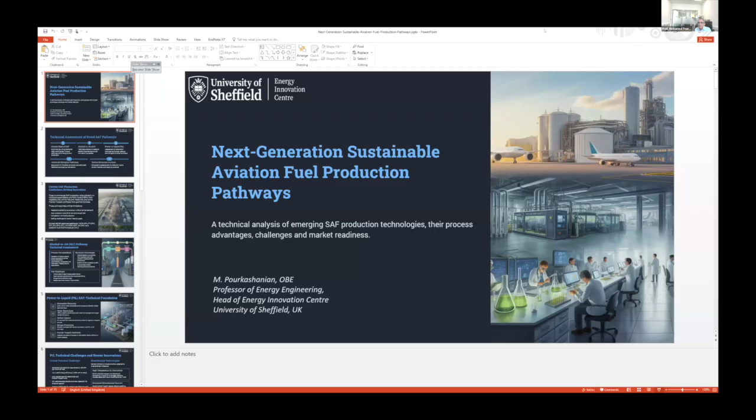Professor Pourkashanian, would you be able to switch on your video? Can you see me or can you hear me? Yes, I can see you and hear you. Okay. Would you like me to upload it or you are doing it? I would prefer if you could upload it. It would be easier to navigate. In case you prefer that I upload. No, sure. I will do that, no problem. Can you see my presentation? Yes, it's just come up. I can see it in normal mode. Okay, it's on the second screen. Sorry, let me just. Sure. Should I present it? Happy to do that. Sorry? Should I present it? There is a two screen here, so it goes onto the second screen. Let me just. Sure. Yes, please take your time. Okay. Let's see whether I can do it now. Okay, can you see now full screen? Yes, we can. Thank you. Okay, thank you very much.

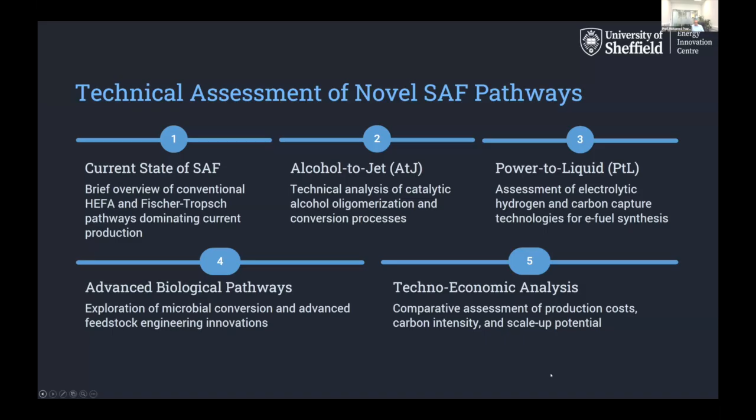But as the previous speaker mentioned, there are other options available: alcohol to jet. There are certain technical issues that have to be resolved and optimized, but it is available. You can actually make SAF from alcohol to jet, whether it is methanol or ethanol depending on the route that you produce, but also power to liquid. Power to liquid is a very interesting route, because your feedstock is more or less unlimited. And when I say unlimited, providing you have green hydrogen and you are capturing CO2, whether from a combustion process or from direct air, you can produce SAF using power to liquid. And there are some other technologies coming in, and these are more advanced biological pathways. We will look at these very briefly in the next 15 minutes.

So why do we say HEFA, which is the existing technology, why do we say that we still need some other technologies? One of the reasons is definitely feedstock, availability of feedstock, cost, and more importantly, the carbon footprint. In other words, if you're using HEFA, at best you will be replacing fossil fuel in terms of CO2 emission by around maximum 75%, depending on the way that you produce it. And therefore, in replacing jet fuel in terms of CO2 emission, HEFA only covers part of that.

But more importantly, from a commercialization point of view, there are certain critical limitations. These are feedstock availability. If you consider all the feedstock available through the route that has been used at this moment, you're talking about 2.5% of the international jet fuel demand. Look at the cost: one of the major issues for SAF is the cost, and therefore high production cost at this moment. The best you get HEFA at the market is around $2.2 per liter, and therefore it is pretty high in comparison to jet fuel.

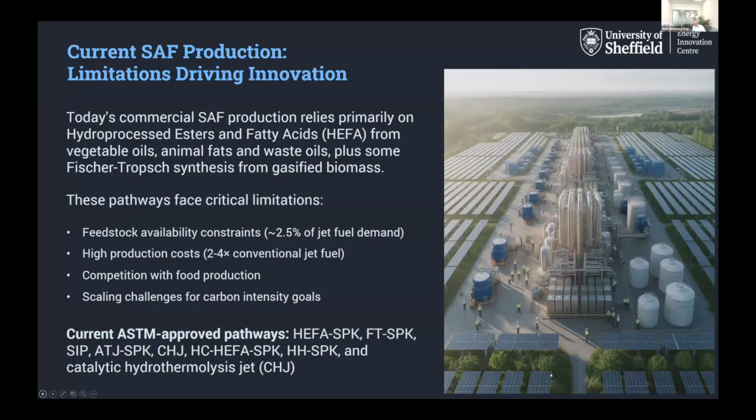And more importantly, there is a competition between using feedstock through the HEFA route to produce fuel and food production. So there's another challenge, and a scaling challenge for the carbon intensity goal that I mentioned before, that it doesn't replace jet fuel at 100%.

So what are the technologies available? Alcohol to jet, and these are the alcohol to jet pathways, methanol and ethanol. Ethanol is possibly the best route because it also has an infrastructure already set up, so you don't have to restart from the point of view of building the plant for ethanol production. And the process fundamentals, I will not mention too much because previous speakers already talked about this.

But in terms of technical advantages over HEFA or over the existing technology, you have variation in the feedstock. You can go all the way from sugarcane, corn, and all other types of biomass into ethanol. And more important, as I mentioned, utilization of the existing ethanol infrastructure and superior cold flow properties in comparison to HEFA, and more importantly, lower aromatic content.

And I will come back to this later on, showing one example from Flight 100, why reducing aromatics in the fuel has a major impact on the contrail, on the energy density of the fuel, and therefore is considered a benefit, providing we stay within the 8% rule of the ASTM.

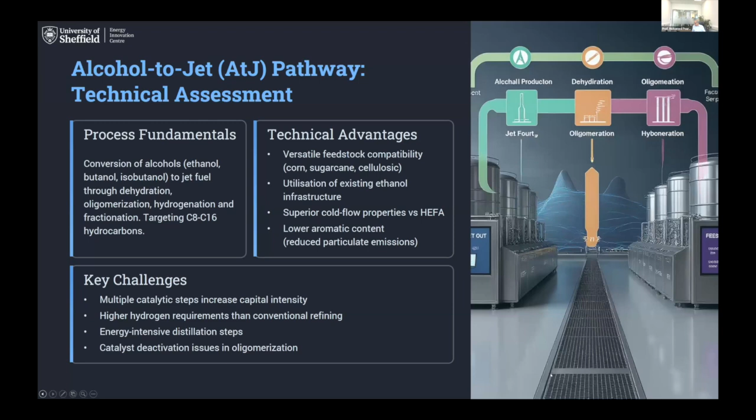Power to liquid: what are the technical foundations for power to liquid, and why is there really a push, especially in the European market, towards power to liquid? If we look at the regulation mandate of the European Union, by 2050, according to that mandate, 70% of all the fuels to be used in the EU should be SAF, or non-fossil fuel. And out of that 70, 50%, or in other words, 35% of the total jet fuel used in Europe by 2050 should be power to liquid.

Power to liquid has many advantages, especially in terms of carbon footprint. It is produced providing you use renewable electricity, and this can be excess energy that is available, solar, wind, or any other sort of renewable power, biomass, BECCS. Water electrolyzer, whether it is PEM-based or alkaline-based. Carbon capture, whether you capture the CO2 from industrial or power generation, or whether it's direct air capture or a biogenic source. Carbon capture has to come from there. And then, having all those three feedstocks, you go through syngas production, and once syngas is produced, you go through a typical Fischer-Tropsch process.

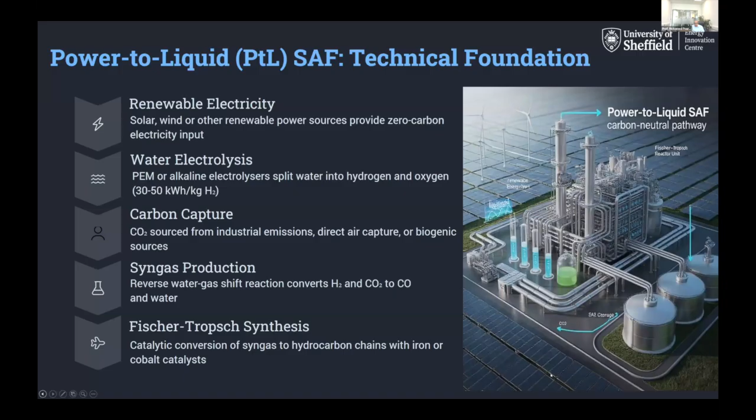So why are we not doing power to liquid? There are many challenges at this moment. The critical technical challenge really relates to the extremely high electricity requirement. Especially if you are using the grid, you are dealing with very expensive power, and therefore the cost of SAF produced through this route will be very high. At this moment, especially if you are using a reverse water gas shift reactor to convert CO2 to CO, because of its high energy requirement, you have a lower overall energy efficiency.

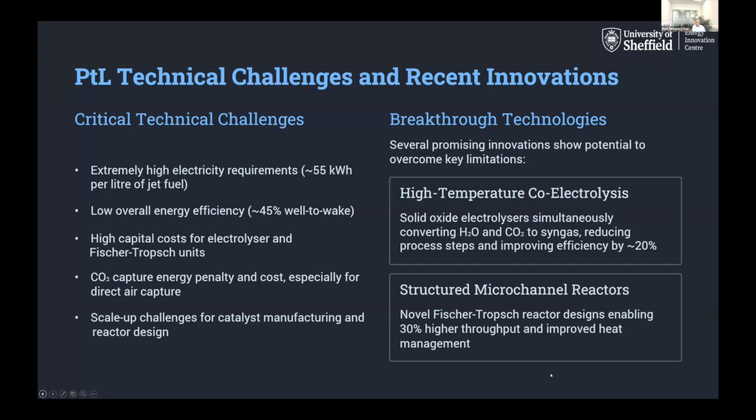And then we have, of course, next generation technology that is very much based on microorganisms, creating an entirely new production route. These are at a very low TRL level, but once it does start to produce significant amounts of fuel, possibly beyond 2035 or so, these types of process will become very important.

And this is really what you do in this sort of process. You molecularly engineer the jet fuel. You actually use the biology platform to develop a product or a fuel that is required for the aircraft engine. And the main advantage is that you produce fuel that engine manufacturers want. So in other words, you produce fuel for the engine, rather than what was happening before, where the engine was produced in order to meet the requirements of fossil fuel-based aviation fuel.

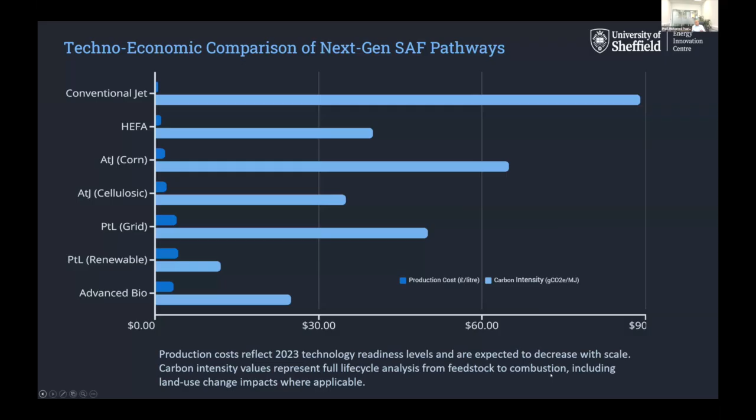And as you move on to the next generation technologies, you see the changes taking place. Costs are increasing and carbon intensity is reducing, which is a really clear indication of how to move forward. For example, if you look at power-to-liquid, providing you are using renewable energy, you see how low the carbon intensity is in comparison to all other technologies. And these are the sort of areas that you have to balance to see which one is best.

So I'll give you one example, Flight 100, where we looked at the impact of SAF on the environment and on fuel efficiency. Flight 100 was a flight organized by the UK and US governments, led by Virgin Atlantic. They were brave enough to take the challenge and say, if using SAF at 100% on both engines is a challenge, they accept that challenge.

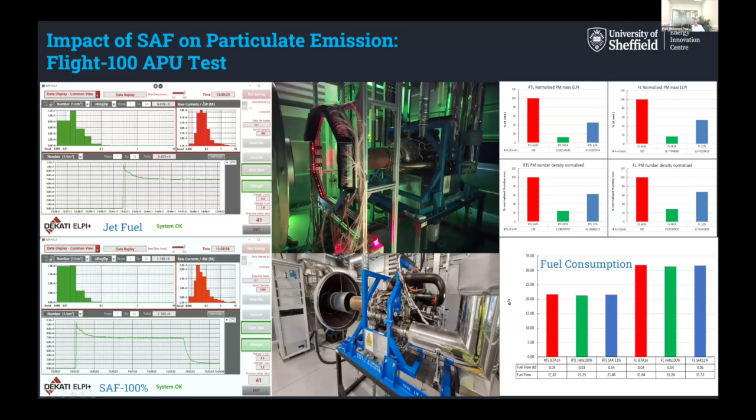And then we have a Fischer-Tropsch reactor that these gases are fed into, and therefore you end up with SAF. And there we carry out performance tests using our APU engine, aircraft engine, and if necessary, characterize the fuel for pre-screening and tier 1, tier 2 ASTM type characterization.

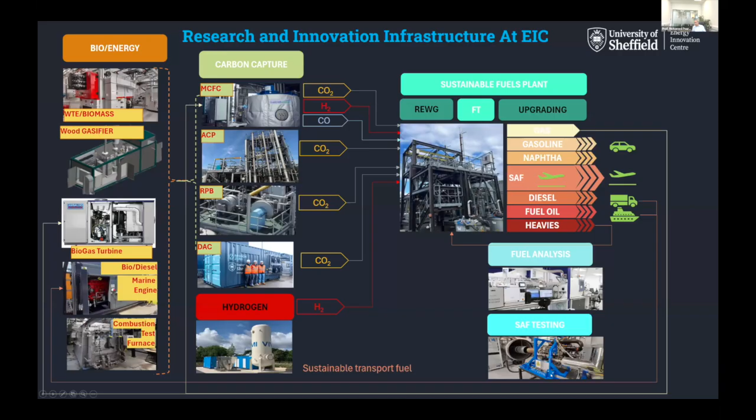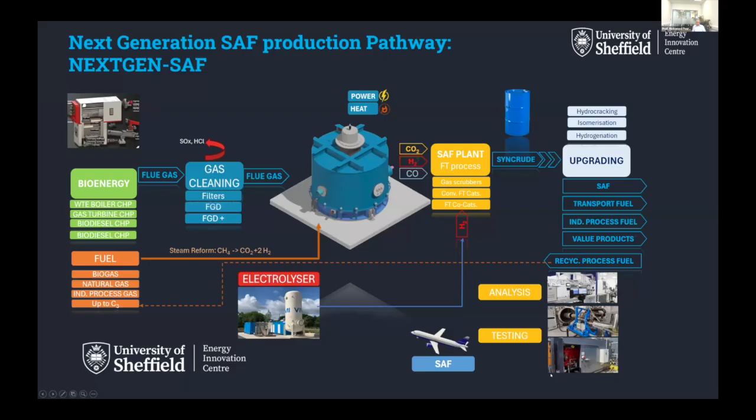We are now working on next generation technology for SAF production that will have a major impact on the cost of SAF produced. And this is one of the projects funded just recently by the UK government, and therefore we are looking at producing SAF and at the same time capturing the CO2 from industrial processes and producing power, and if required, producing hydrogen all at the same time. And this is a technology that is really proving its great potential for the future.

So I finish with my little comments: what are the research priorities? If we look at it in terms of research, I would say catalyst, catalyst, catalyst. The catalyst that has an improved selectivity and lifetime, you increase the efficiency, you increase the performance, and therefore reduce the cost.

We are seeing every day more and more advanced electrolyzers introduced, and therefore efficiency of these electrolyzers will have a major impact on power to liquid, because the cost of hydrogen is a major challenge for power to liquid. And finally, developing a low-cost, scalable CO2 capture technology. Direct air capture at this moment is extremely expensive, and therefore, how can you improve that? Moving to the demonstration project.

My apologies. If you could wrap up in the next minute or so, that would be great. Great. That's the end of it.

Yes. Scale up integrated power to liquid and establishing more power to liquid demonstrations. And finally, in terms of policy, all of these research priorities and demonstration projects can go ahead if the policymakers provide that certainty to the investors that SAF has a future and will be a major fuel for the future in terms of decarbonization. And that is all from me.